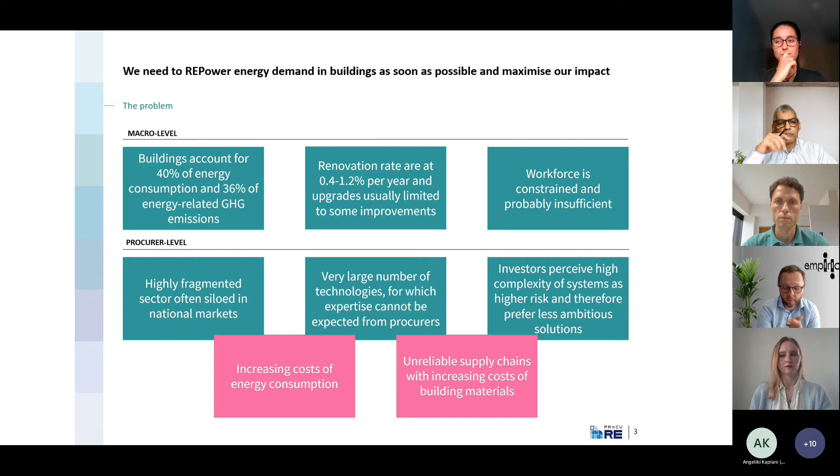So maybe with less we can achieve more, which means that instead of insulating a building entirely with lots of materials, maybe we can use smarter, fewer materials, more intelligent materials, which will achieve what we want. Basically, buildings that are near carbon zero - carbon zero in the sense that they produce enough electricity on site to work.

This is the summary of the project. 6 sites, 6 cities, 6 procurers in 6 countries, which have a huge building stock, which want to get away from carbon-based energy. And for this, one of the ways to go is to eliminate off-site supply of energy in existing buildings - basically renovate, but also ensure that they not only consume less, but produce enough electricity and energy to run net zero. We are spending money on it, it is an R&D project. The 3 suppliers will have later opportunity to present basically their approach to this solution, to this problem.

Me again. A brief reminder on the challenge, basically to focus the discussion later, not to say that other things are not also important or that there are other ways, but our project, our approach is maybe a bit, it's not the mainstream right now, and hence to refine that.

First things first, what it is not and what we will not do in this event is to talk about innovation procurement and pre-commercial procurement in general - the phases, the way that you get several suppliers in an early phase to give you advance the solution and to ultimately pick two to implement it. It is not the topic, but if you want to know, in the slides you will have links to watch earlier videos. What has been said then is still true.

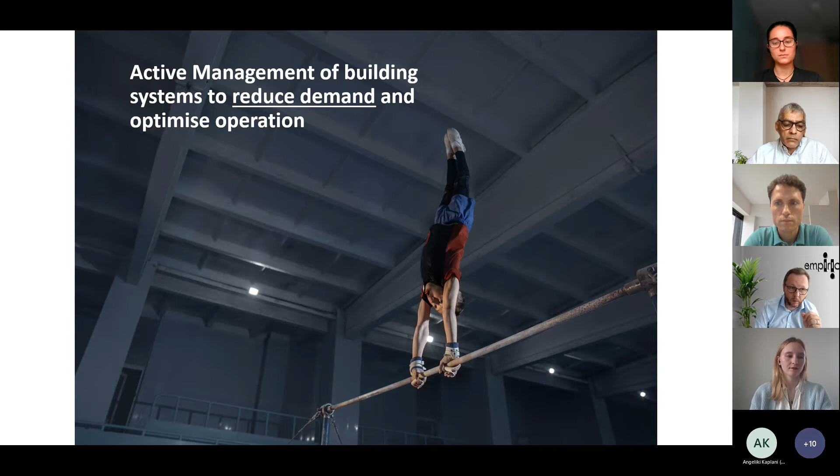As already implied, the building itself should work on renewables, and the renewables should be produced on site. It is a requirement in that sense that the maximum of what is going into the building should happen on the building and with the building.

If there's potential of roof supply, a lot of surface on the roof, that it's utilized for PV, wind, and whatever technologies. Because it can happen at once, you go into the building, you do everything at once, and you don't have to go anywhere else.

Obviously some buildings have limits, it is simply not possible, so we say to the largest extent possible. Our ultimate goal is net zero. In some buildings it is physically not possible, but we push the envelope as far as we can get.

The background to this is also, I don't know, 10 years into the future, hopefully our governments keep their promises and say that renewables need to be extended. There will be a lot of PV plants on all kinds of buildings, and the grid will not have the same capacity to accommodate, to take it away, as so far.

Which does not mean that we will not export energy into the grid if our storage is filled and whatnot. We will not become an island - that's not the goal, that's not the ambition. There will always be use for energy, and if energy is exported, then someone else will find a use for it.

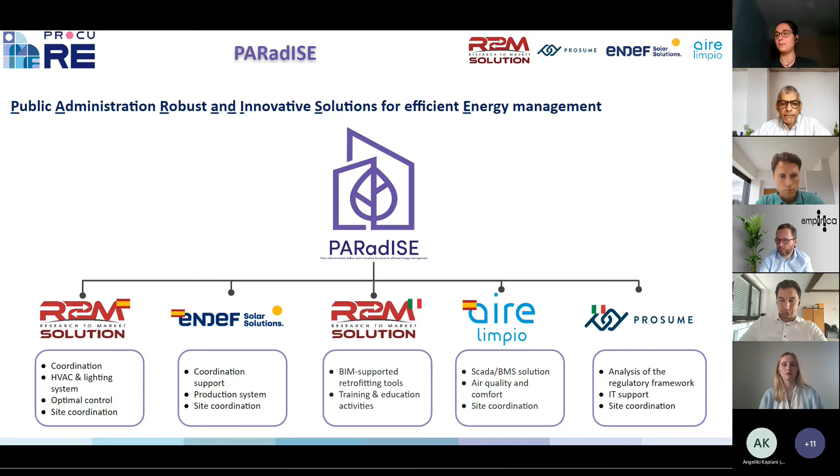I'm from R2M Spain, and I'm going to present the Paradise Consortium and the idea or solution we envision to tackle the challenge that procuRE is proposing. The consortium is composed of 5 Italian and Spanish partners with different expertise, which help us develop and work on the key points or key elements that we are proposing in our solution - mainly 7 key points.

The first one is a co-design based on BIM that works like the major enabler. Then a BIM-supported retrofitting process, which is an adaptation of an ISO standard, a 3-phase retrofitting process named Inception, Design, and Production. The heat pump, which is the core of our solution and technical solution, for integrating and ensuring the interoperability of different renewable energy systems. PVT solutions that help us combine in a unique panel the electrical and thermal production.

Then the deployment of a SCADA system for the BMS and then the EMS. The system modeling helps us model and virtualize all the real systems, so we can simulate their performance. And finally, the optimal operation control, which is a combination of real-time optimization, MPC, and adaptive control.

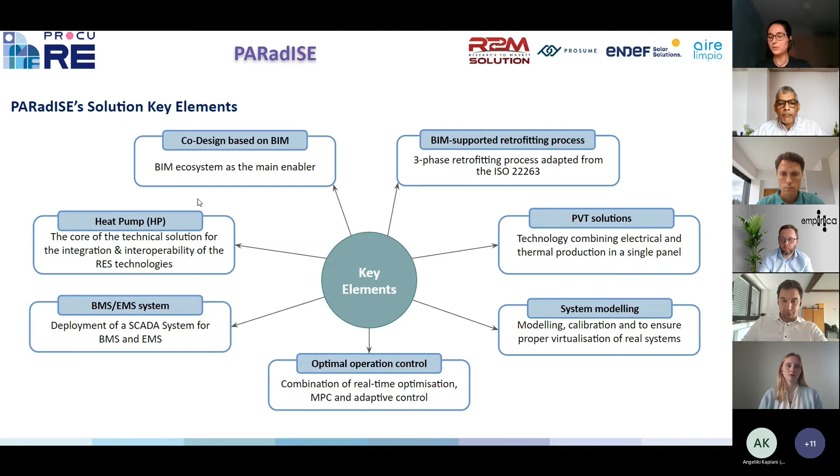So to tackle the challenge, we created a framework that starts from a base structure of renewable energy systems that has a heat pump at its core, and is also combined with other energy storages. We then virtualize the system, as I already told, and we use optimized control strategies to find the best combination for each specific site.

This helps us maximize the share of electrical and thermal energy, and also do demand response based on advanced operational strategies. We rely on the smart management system, which is the SCADA, for the communication channel and interface for the different systems that are going to be integrated. On top of it, we work with an optimal control strategy to perform optimal predictive control over those systems for production.

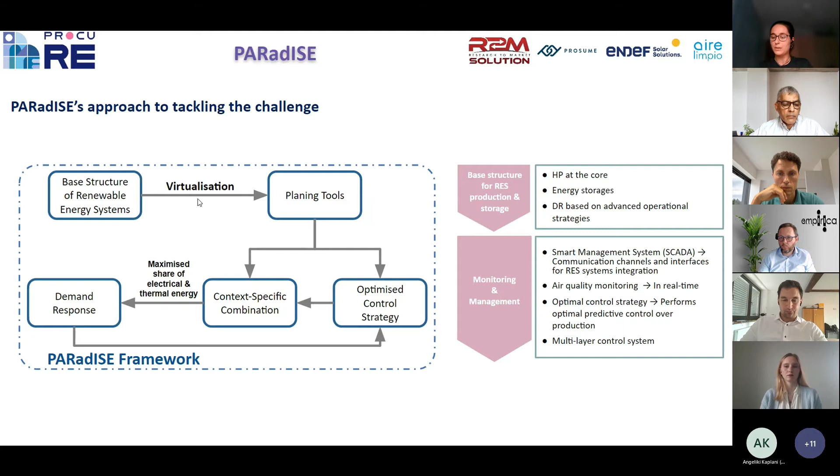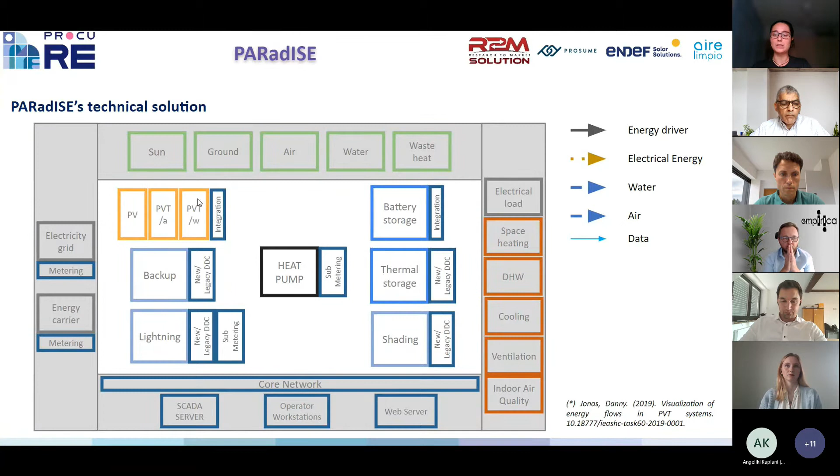The technical solution that we envisioned is based on a scheme proposed by the International Energy Agency in its Task 60. It basically defines the final energy, the useful energy, the sources, and the different elements that are going to be integrated, and these boxes are highlighted depending on the solution proposed for each site.

We work on a co-design procedure when we implement the design thinking methodology, a standardized methodology that helps us, the Paradise Consortium, understand the needs and requirements of the users, procurers, building operators, and so on, and helps us prototype and retune the solution according to those needs. This is an iterative process, so we can work on it until we get the best combination, and all of it is connected to the BIM I already talked about.

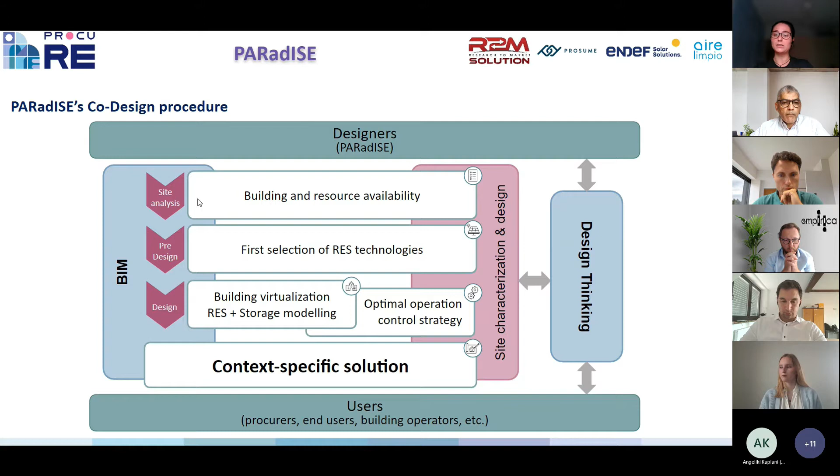Regarding the financing models, we differentiate two stages. The first one is during procurement, where it's supposed that the implementation of the solution is covered by the funding available in the project, and the recurring operational, maintenance and licensing fees will be covered by a tailored business model conformed together with the procurers.

During this process we will also validate other financing models for after procurement, composed of three main points. The first is the validation of innovative approaches for financing renovation and operational maintenance. We are basing this on two European projects: Invest, which develops and validates a risk evaluation framework, and NEON, which develops and validates an innovative financing method. This will be linked and underpinned by the deployment of the digital logbook, which helps reduce connected risks and increases confidence in investors.

Finally, we will implement the market and technology watch strategy that will help us detect and analyze public fundings that may give procurers opportunities for energy renovations. This is what we are proposing for this project and this particular challenge.

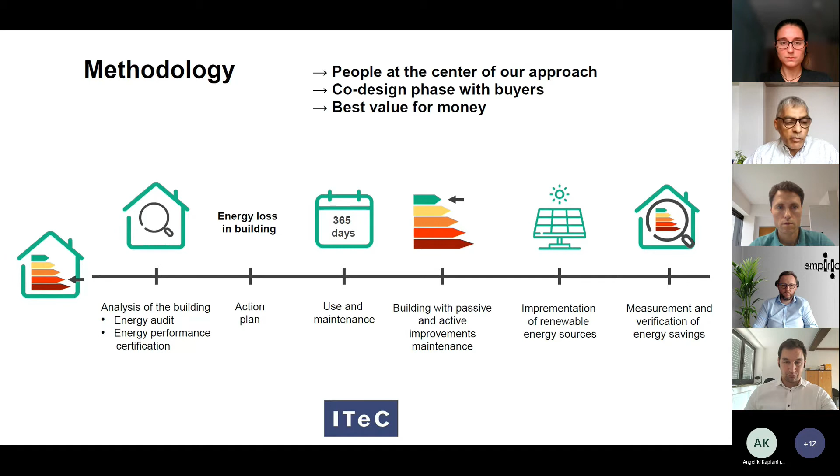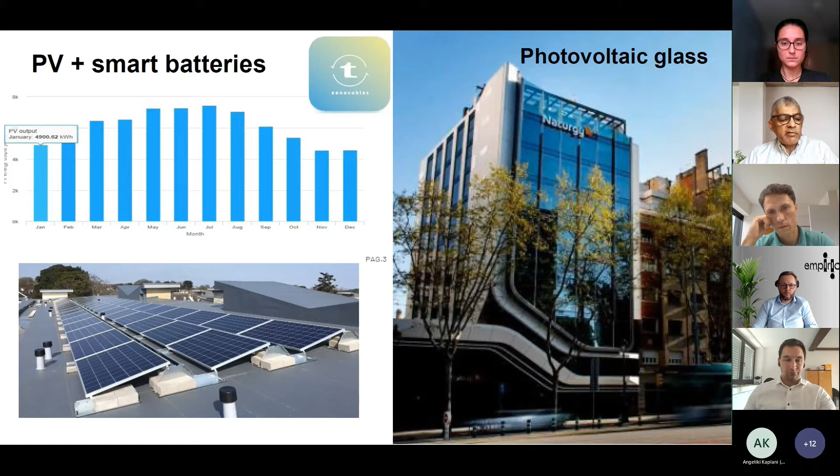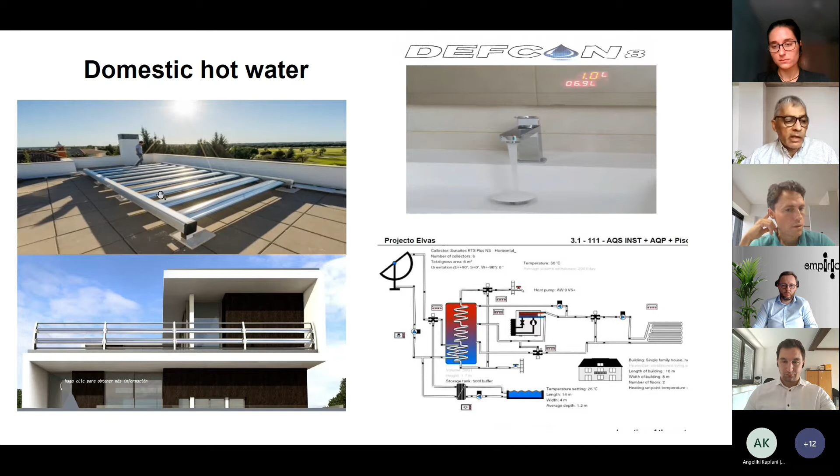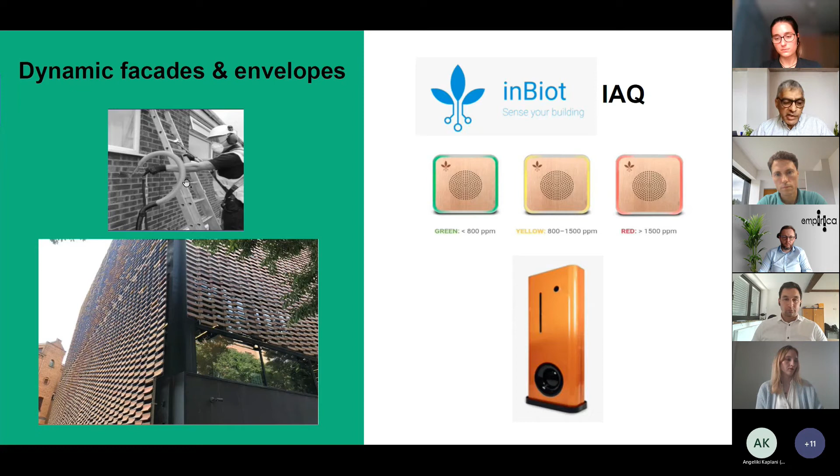We like to call it a win-win. To achieve these net zero energy buildings, the technologies we use are solar panels, photovoltaic glass, batteries, heat ventilation, air conditioning, smart heaters, electric chargers, domestic hot water harvesting and monitoring, hydrogen seasonal storage, LEDs, wind harvesting, thermal and acoustic isolation, dynamic facades, indoor air quality measurement and air purification, and solar thermal collectors for floor heating.

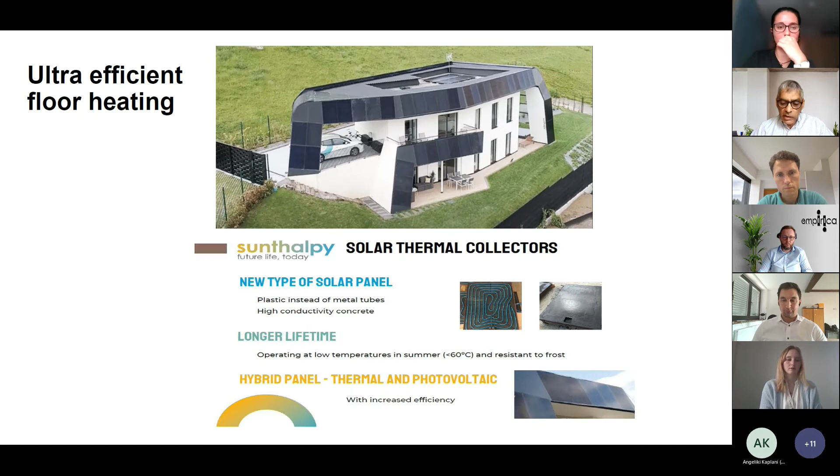All these technologies are monitored and integrated in a real-time SaaS platform. It's a really powerful tool where facility managers and users get at a glance what's happening in the building. You can parameterize all the main setting points, whether it's temperature, and measure all the parameters to make settings and see how the building reacts.

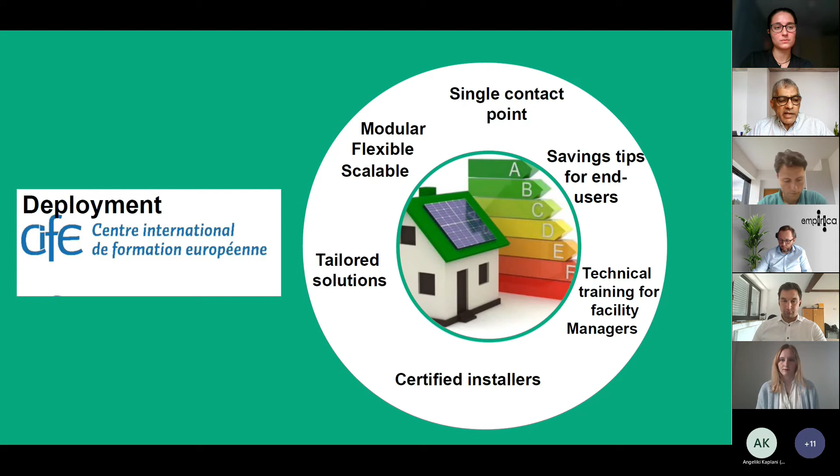It's not just a passive system, it's active, because it takes into account weather forecasts and reacts accordingly. The solutions we provide are state-of-the-art technology tailored to each building's needs, modular, scalable, and flexible. A very interesting feature of our consortium is that we raise awareness of users and provide easy-to-follow tips to achieve savings by making small changes in our daily behaviors, as we know users play a key role in achieving savings.

The applications go from schools to offices and of course also to any kind of other buildings, whether it's hospitals, hotels, private households, libraries, shopping malls, sports centers, etc.

The funding is discussed in each case, whether it's private, public, or crowdfunding. So this is talked about and discussed in each particular case.

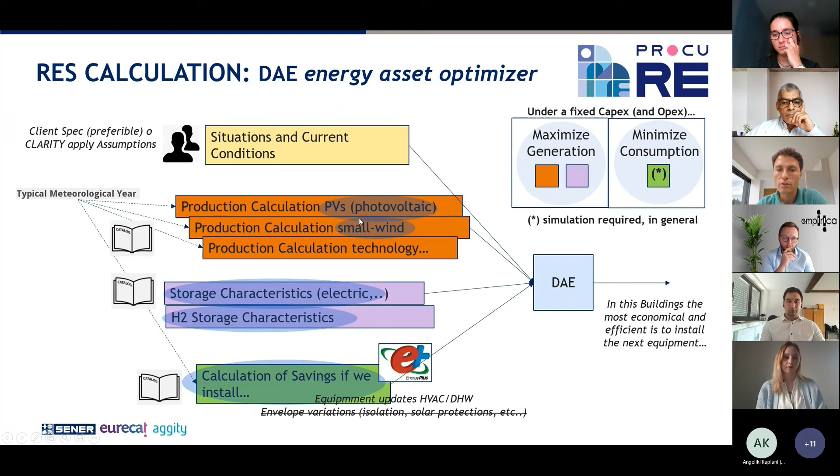The other part is minimizing consumption. Of course, we are counting on that. We are introducing different upgrades for the systems and facilities of the buildings, the main consumers - the HVAC and domestic hot water systems, and of course lighting systems - in order to reduce consumption and have different consumption curves every hour, to mix them with the batteries and the generation we are proposing.

With a couple of parameters, we can have a very good approach to your renovation. Just knowing your consumption curve every hour of the year, and the surface of your roof, we can make a very close approach to the solution.

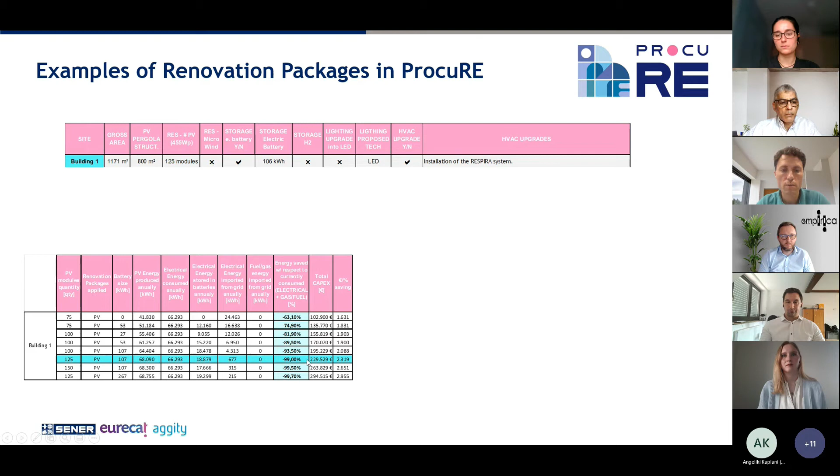The optimization tool that we have could lead us to find a solution based on, for example, deployment of PV and energy battery, giving us the energy saving percentage under a capex. We always fix the capex at first, and then we find the best combinations, and select the combination that fits best. That's what our tool does.

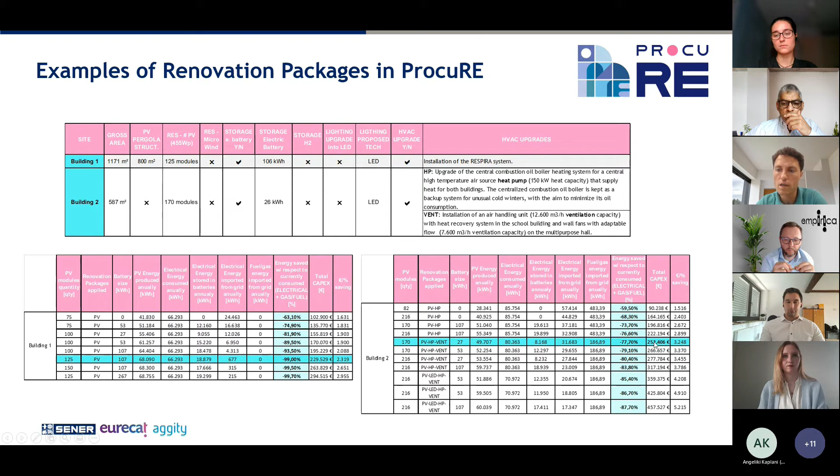We can have another example with different combinations: PV deployment plus a battery, with heat pumps, renewable upgrades, and ventilation with heat recovery. For example, to get the best energy saving, we could have more energy savings, but under a larger capex. So we establish the limit, the ceiling capex, and we select the best combination.

Okay, yes, I think we talked about the EMS, the energy management system, and the Respira system. Of course, I'm open to all the questions you may have, and thank you very much for your time.

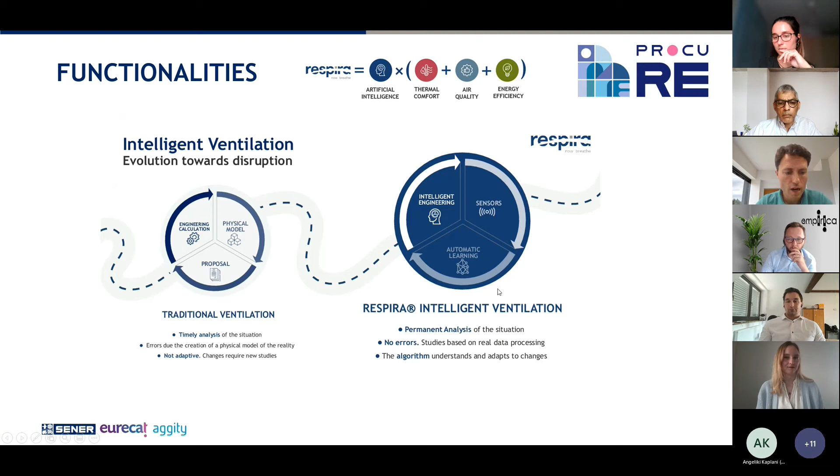Very good. Thank you, Juan. Very detailed.